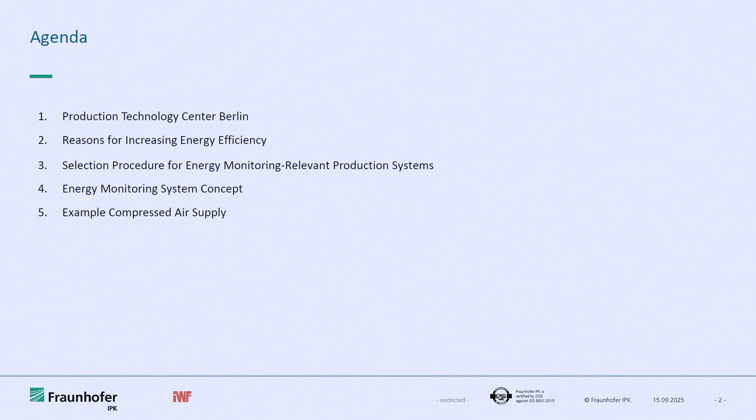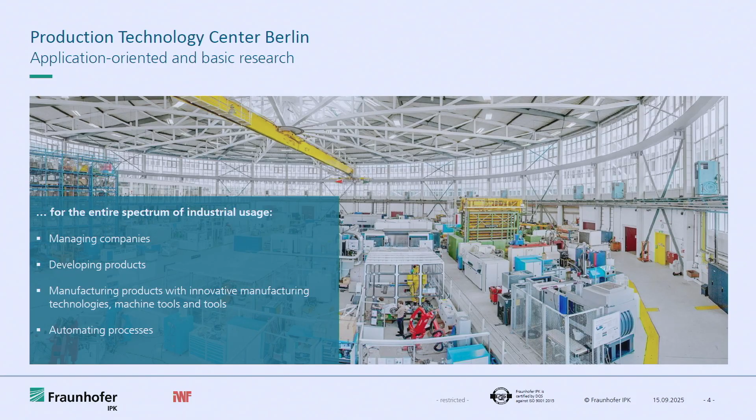Then introduce our energy monitoring system concept, and then give you an example for a central compressed air supply, because compressed air is an essential energy user in production. What you see here is our institute in Berlin at the Spreebogen, the Production Technology Center. We do research for the entire value-added chain, so from corporate management via virtual product development, manufacturing of products, and the automation of processes. Just a few facts and figures on our institute.

The Institute for Machine Tools of Technical University of Berlin was founded in 1904. It's one of the, if not the oldest institute dealing with production technology as a science. The Fraunhofer Institute for Production Systems and Design Technology was founded in 1976 in Berlin. And then together in 1986, the Production Technology Center was founded. We have about 620 employees, fluctuates a little bit, an area of 9,500 square meters, and 90 test stands and special labs.

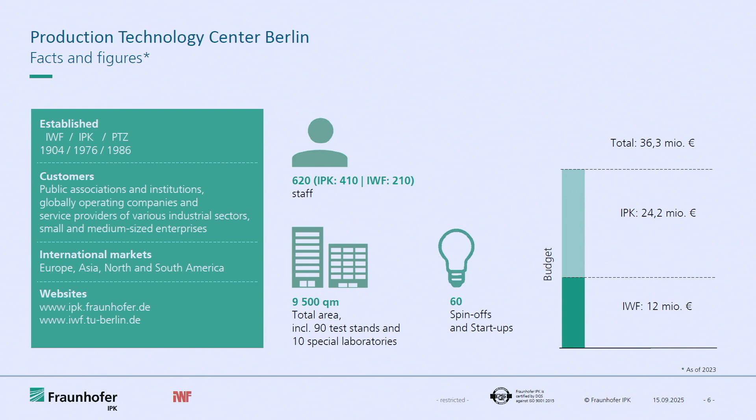And what we're very proud of is that over the course of the years, we have had 60 spin-offs that, for the most part, are still very successful on the market. Just a few words on our budget, an overall budget of 36.3 million euros, and the Fraunhofer Institute accounts for 24.2, and the other institute accounts for 12 million.

So, a few reasons to increase energy efficiency. I suppose I don't really have to explain very much. We all know that climate change is very real. We can't get away from it. We have to take the right measures to handle it in some way or another, and in order to mitigate climate change as far as possible.

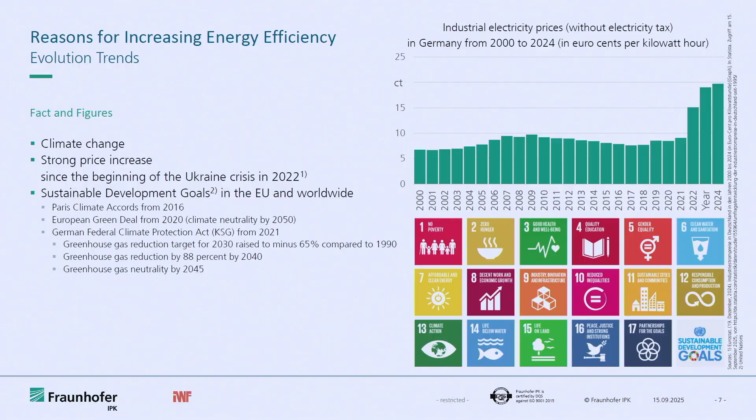And then we've got the measures that the EU has issued. There's the Paris Climate Accord, then there are the SDGs, the Sustainable Development Goals, then by 2045 at the latest, we want to be carbon neutral in Germany. Germany has set itself very ambitious goals here. And in production, things look rather different. Energy consumption in industry has increased by 4.6% in comparison to the previous year. And the distribution is, as you see here, 30% is accounted by industry. That's about the same share as for traffic and transportation.

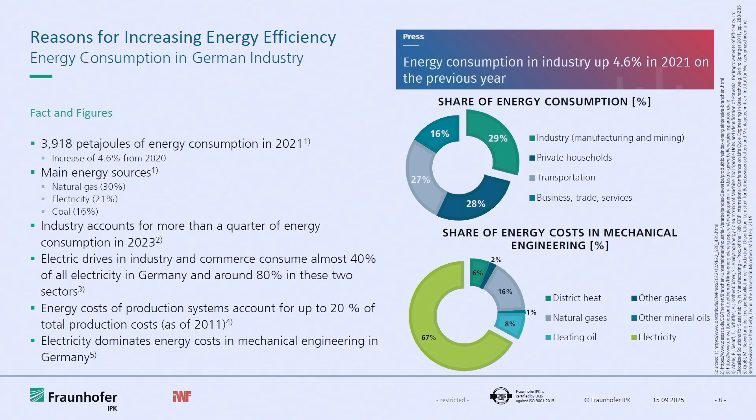And then in mechanical engineering, and we're at the EMO here, which is all about mechanical machining, the largest share of energy costs is accounted for by this. We've got pumps and compressors and the machine tools that you can see here, and they are, for the most part, powered by electrical energy. So this is one possibility. If you want to start off making your production more energy efficient, then of course there's always the problem of where to start and where to go.

So you've got numerous instructions. We approached this in a very pragmatic way. We thought, well, what kind of influencing factors do we have? We've got the nominal power of the machines that we know from our data sheets. We know the different modes that our machines are operated in. So are they in stationary operation or are they highly dynamic? And examples for energy monitoring where it would make sense to do this energy monitoring are machine tools and compressed air compressors.

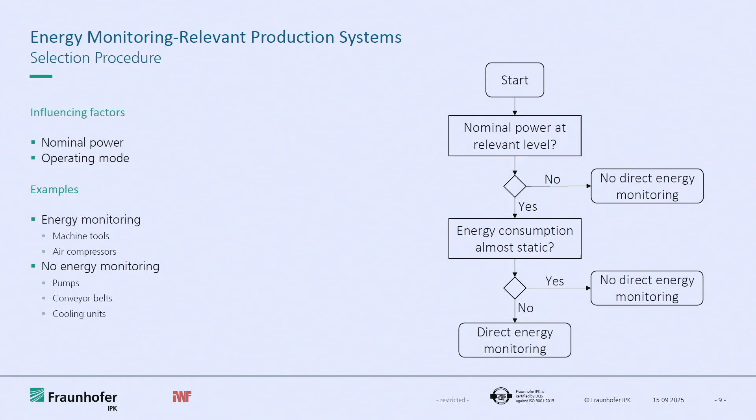Where you don't necessarily need direct energy monitoring is stationary pumps or conveyor belts or cooling units. Once they are stationary, you can really estimate quite well how high the energy consumption is just looking at the data sheets. And the more you monitor, the better the transparency, although, of course, you have to have a cost-benefit comparison.

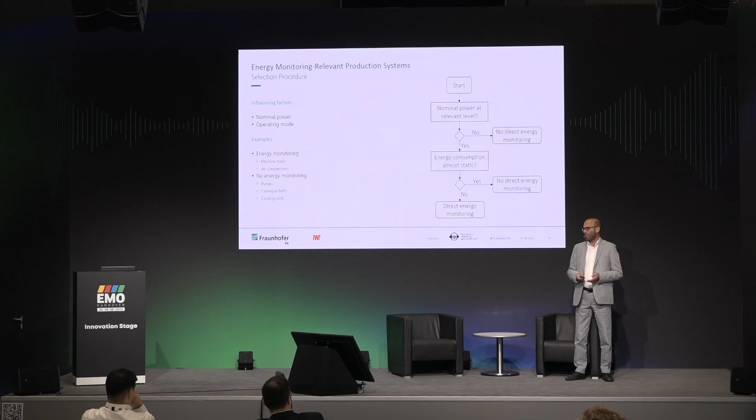Now, how do you do this? How is the process? It's relatively easy. You look at the nominal power and see whether this goes beyond a certain relevant level. So, for instance, a bulb is not relevant. A machine tool with lots of kilowatts of nominal power would be relevant. If you have a static consumption, then you don't need direct energy monitoring, but can assess this via the switch-on, switch-off times. If you have a highly dynamic system, as you have it for most machine tools, then direct electricity monitoring would be worth it.

With energy monitoring, you can also do condition monitoring of plants. We all know that a fridge that doesn't shut properly, where the seal doesn't work properly, uses up more power than a fridge that's working well. And the same holds true for the cooling units once the filters have been clogged up, or pumps that don't work anymore.

So our concept at the Institute was developed as a challenge, looking at individual production plants and aggregates. We wanted a modular, scalable system and a cost-efficient solution. And we wanted a solution that you can also use for an energy management system according to ISO 50001. And also, we wanted to make it possible to have order-related energy consumption billing.

Order-related, this is important because you've probably all heard of the digital product passport, and the energy consumption per manufactured part is becoming more and more relevant. You could do this via life cycle assessment databases. However, usually this is an estimate, so it's much better if you have the direct energy consumption measured and can assign this to your product.

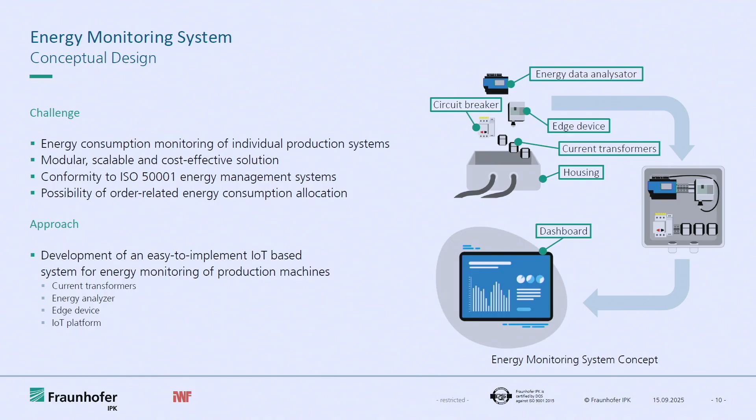So you can see our concept here on the right-hand side of the slide. It's not rocket science. You take current transformers that you use for the different phases of the three-phase network. Then you need an energy analyzer, that's the blue part right at the top, which is also enabled for ISO 50001 and provides the right parameters. Then you need an edge device so that the data can be transferred to an IoT platform. And then you've got a dashboard where you can look at the individual parameters over time, and you've also got the results of the analysis.

In the edge device, the data can be pre-processed. If you don't have the raw data that you can transfer to the IoT platform, OPC UA comes in here, or MQTT. MQTT is the more lightweight protocol, which is very well suited for pure sensor data and transferring them into the cloud.

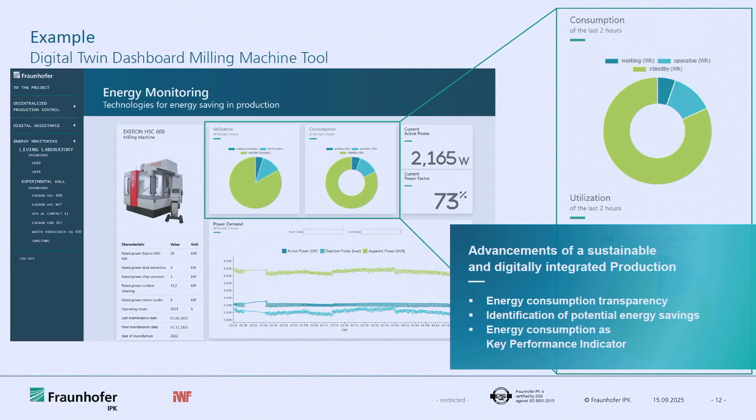So at the end of the day, if you do this kind of energy monitoring, you can look at potential savings of energy, and when it comes to energy consumption, this is also a KPI for production, which becomes more and more relevant in the present day and age. Now, this is my example. I hope you can see it well enough.

We chose an example where we wanted to find out in an automated way when a machine is in operating mode and when it's in the standby mode, and the machine operators jotted down when the machine was ramped up, when the orders were machined, and you see here quite clearly this is not a series production. We're a research institution, so we have longer breaks in between and alternating orders.

So we automatically analyzed how many watt-hours a process took, and you see the same process used up 2.7 kilowatt-hours on average, and standby mode, which is depicted in green, shows you that 650 watt-hours were consumed.

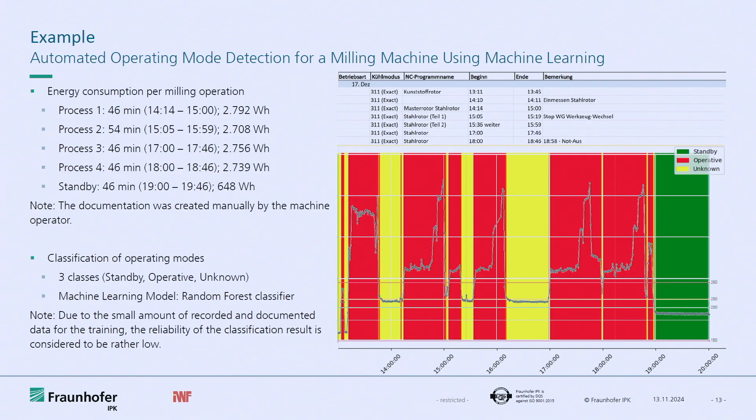And in this particular case, it was the random forest classifier. And as you see, by the 3 different colors, we could identify the 3 different modes very simply here. So if you want to ask about the quality of categorization, this was just an example. We know that we're talking about machine learning. The more data you have, the better the algorithm will perform.

In the end, we didn't have that much data, so we can assume that the quality of categorization isn't necessarily usable for many other processes too. It's not representative. Another example in the area of compressed air supply.

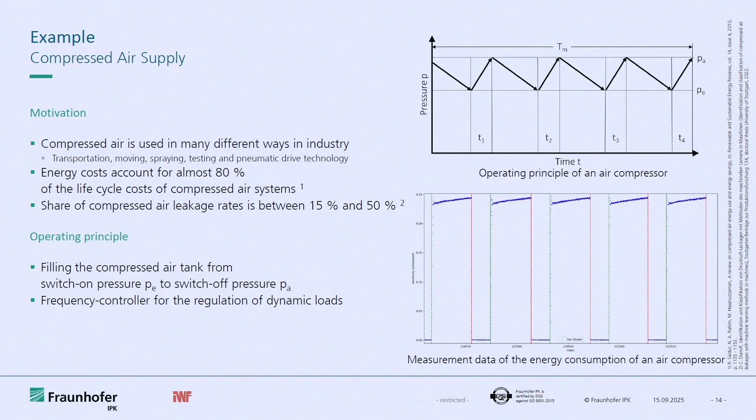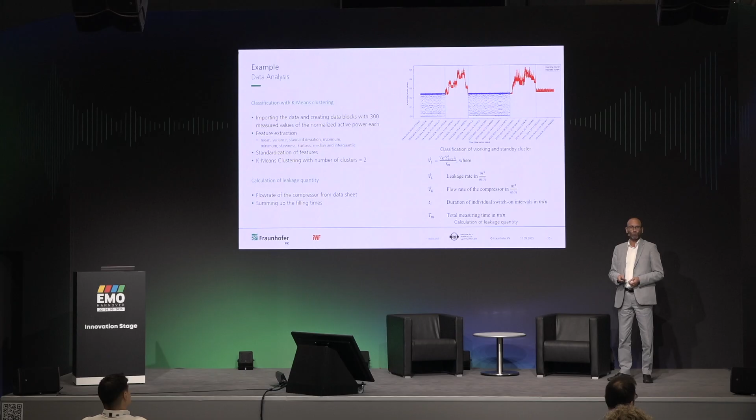However, it's important to know that the switch-on, switch-off times are counted. Then you have the flow rates of the compressor as it is set from the data sheet, and then you can look at the leakage rate and calculate this yourself. And up here you see that with the help of machine learning, the k-means clustering in this particular case was able to calculate the standby and operative times, and this means that the blue areas are the areas that we can use to determine the leakage rates.

Right, and to wrap up, in order to produce sustainably, energy consumption and energy monitoring of consumption is the foundation if you want to use any levers in a positive sense. So energy consumption monitoring is a positive thing on the one hand to make production more energy efficient, but it can also be used for condition monitoring, for predictive maintenance, and all in all it's also good to reduce energy consumption as a whole.

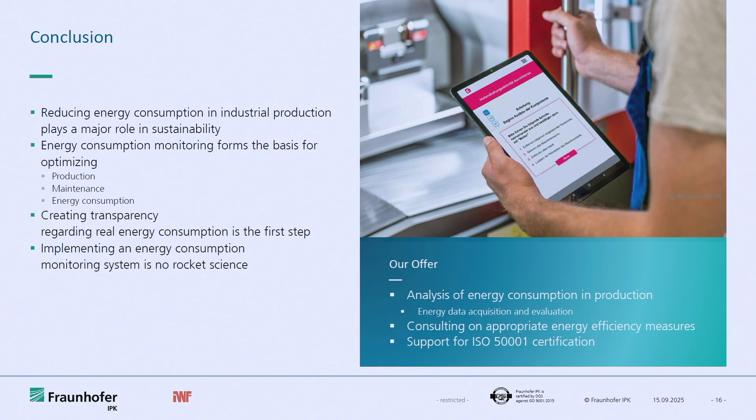The creation of transparency in energy consumption in production is really the first step that you need to take before starting to use any other levers, more or less without any real agenda. So it's really good to look at all this before you do anything else. It's not rocket science, as I said before. Energy monitoring can be installed rather simply, also on an IoT basis, without manual notes or anything like that.

And our offer to industry is that we can analyze your energy consumption with the steps that I outlined before. We can accompany you, consult you and support you when taking the energy data, and we can also consult you on appropriate energy efficiency measures. And they could be of an organizational nature, but they could also be of a technological nature. Processes could be optimized. We have a process for plastic printing where we showed how much optimization potential is in the different process steps.

And then the question always is, where is it worth it? Where isn't it worth it? What's the payback time? And of course, we would also support you if you need an ISO 50001 certification. The work that we did was supported in part by the Regional Transformation Network for Berlin-Brandenburg, and this project has the aim of ensuring that the automotive industry can be supported in its transformation in the direction of electrification.